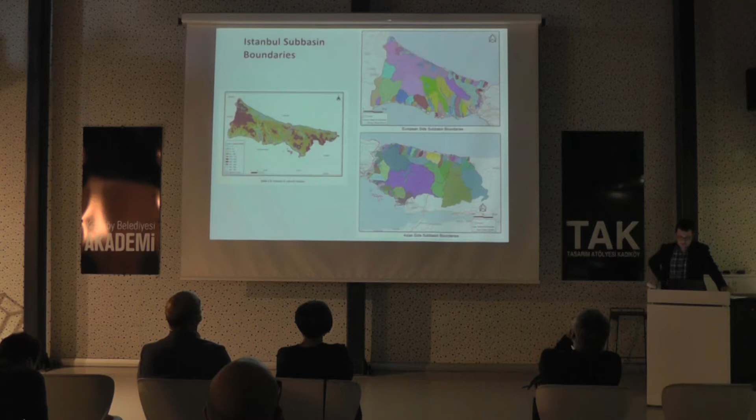First, for flood protection, we make stream restorations. We try to choose the best cross section. I say try because it isn't as easy as making projects or imagining the best, because cross sections depend on making the most efficient one for hydraulic conditions. We make engineering calculations, hydrology and hydraulic calculations, and we have a cross section.

However, land ownership in Istanbul is a very challenging topic, because if you want to make a wider cross section, you need to occupy someone's land, and land prices in Istanbul are very high. So the budget of buying that land is much more than the construction budget.

Also, as a result of some unplanned urbanization in recent decades, we should construct our new cross sections in urban areas. So making construction in urban areas is also another difficulty we face. These are some examples from our stream restorations. I will also mention them later.

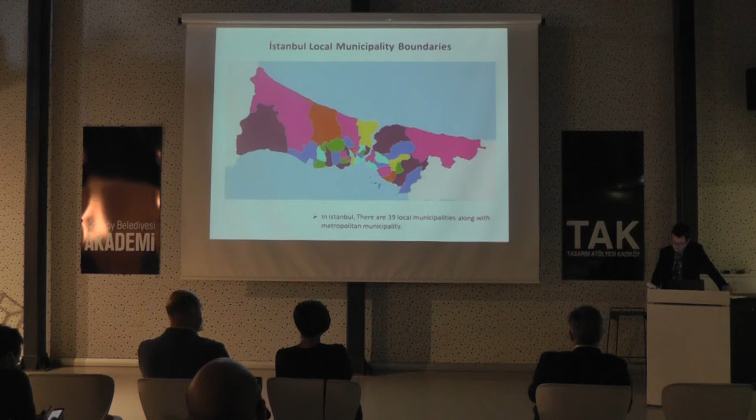Another important information we have from flood maps and share with local municipalities is flood level. As I mentioned before, land price is very high in Istanbul, so we cannot say people don't make a building here, here's a flood area. We can only say, yes, you can build something here, but there is a flood level here, and in case of any flooding, please make your building higher and make your plan according to this flood level and take your precautions in your building.

We want people to build their houses above flood level, and above flood level we want them to put their entrances, electricity and ventilation equipment, etc. The most important thing is that we don't want any residential volumes under flood level in the building, because if you look at the buildings, there are basement floors, and it isn't safe, especially below flood levels. We want contractors to make parking lots and auto parks at that level and use good insulation in their auto park doors.

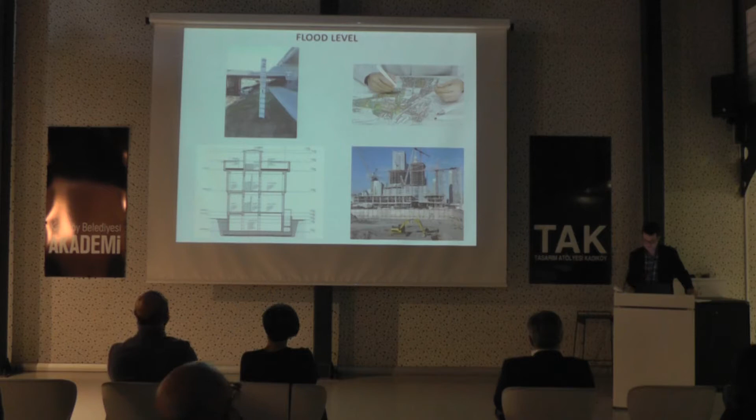And we want all municipalities to make their urban plans by considering our flood maps and flood risk levels. These are some examples from different regions.

I chose them because they are from Istanbul and summarize what I want to talk about. The upper ones are new buildings, and they use our flood level and make good designs. If you look at the buildings, they are high and their windows are above flood level.

On the other hand, the tragic one - there is a flooding and some municipality officer is trying to save someone in a basement floor. If you are in a basement floor, a very small amount of water is enough to make a disaster because you are below the flood level, so the water rises until the ceiling.

Especially people with some disadvantages are much more in danger, like children, the elderly, or handicapped people. Or if you are sleeping, you also have no chance.

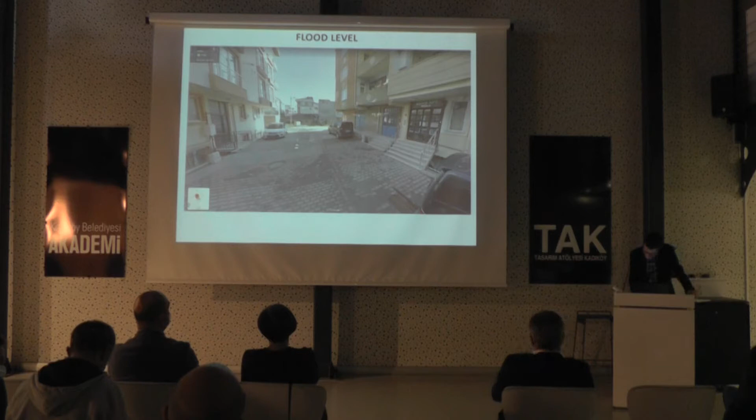This subject should not be open to interpretation. Certain rules and regulations for all regions are needed, to make a general idea. I want to speak some about Ayamama Stream,

maybe as a case study. Ayamama Stream has a very large watershed, more than 65 kilometers square. Both urbanized and rural areas we see in the watershed. But there is something important here: Ayamama Stream intersects two major highways of Istanbul—one is the Trans-European Motorway, and the other is the E5 highway. These are the most crowded and largest main highways of Istanbul.

In September 9, 2009, there was a flood, a real disaster in Ayamama. Unfortunately, 32 people—when talking about these subjects, defining people and life numbers can be easy, but it wasn't so easy. There are more than numbers in those lives.

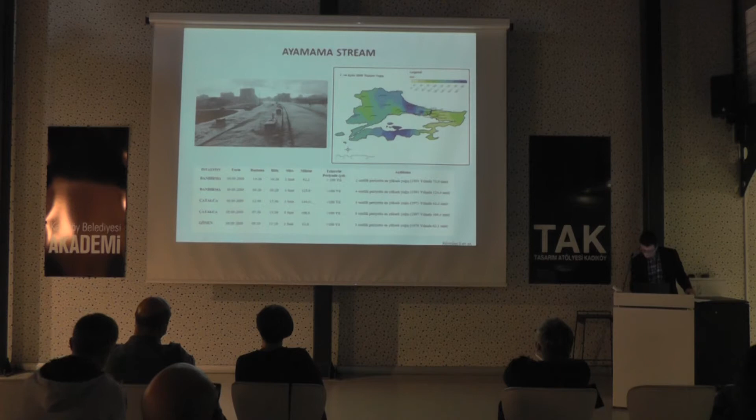I want to watch this. Starting: firstly, the water is starting to accumulate above the E5 highway—here it is the Trans-European highway. There is also some sort of bridge here. There's no problem, but the problems start to appear as time goes on.

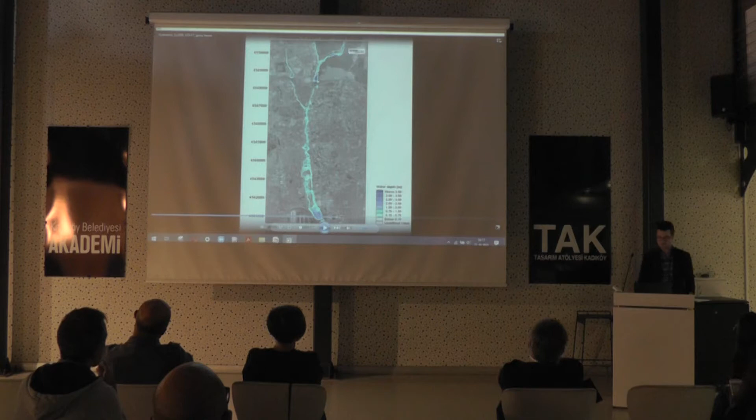It's increasing—there is no dam break until now, but without the dam break we also have flooding. Water began to come from here and from there, and at the entrance, the intersection here, the accumulation of water started, and all the water came. Here we have serious flooding because the water cannot go to the other side of the highway.

There's a large truck parking lot here. Lots of trucks and other vehicles began to collapse, enter the street, and get stuck in the water. Water started to rise and overlap the highway. Now the highway is underwater.

I want to share this with you to show that making proper cross sections alone is not enough to protect your city from flooding. There may be another issue, like a dam, or the cross section may not be in your authority—the highway government department responsible for highways is also involved there. Also, the cleaning of that intersection is important.

Also here there is a very heavy residential and very urban area—there is only gray color here. So we had a disaster.

After that flooding, our municipality decided to make giant cross sections for Ayamama to prevent flooding, but it is still going on. Mostly our municipality and our water and sewage administration finished building, but there are also some parts which are not finished yet.

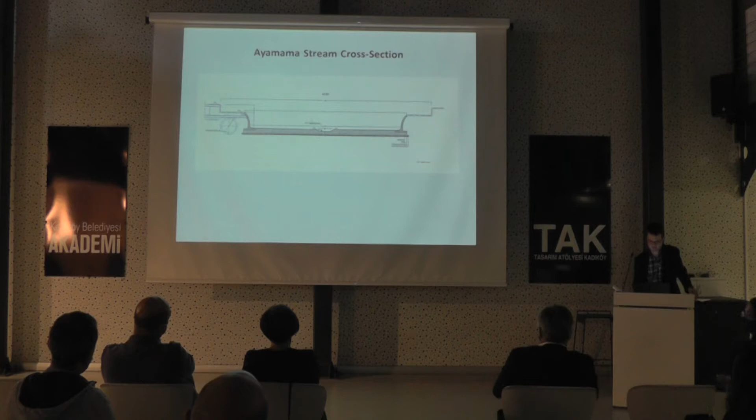It's a very large cross section, as you see, and in Istanbul, in our streams generally we see water only on rainy days—we do not have rivers. So just for a few days in a year we use a large cross section. This is the cross section of our project: we have wastewater pipelines parallel to the stream, and we have the real stream and the base flow area.

In recent years, we wanted to make more ecological and beautiful land and stream restorations. With that idea, for various streams in Istanbul, with our valuable Professor Hayriye Eşraf Tuncay, we worked really hard for most of the rivers and made stream restorations.

In doing that project, I learned something: making proper stream restorations is only possible when you work together with different disciplines—not only hydrology and hydraulics, but also landscape engineers, urban planners, architects, transportation engineers—because streams are the main lines in a city. So you should think a bit wider.

In the cross section I showed before, we want some social areas like these. People can use those areas during dry seasons, and during rain, with an alarm system or something else, people can live there, and we can use that area for drainage. Now we have projects in the near future. I hope we go further and make more ecological and social stream areas.

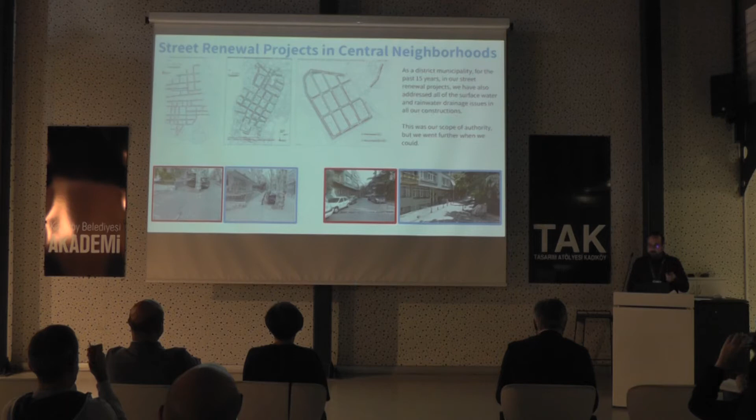These are street renewal projects in central neighborhoods. As I said, within the scope of our authority, we went as far as we could when renewing our streets. You can see water channels, etc., all renewed, and this would drastically decrease the precipitation that was discharging into the stream.

Maintenance of rainwater infrastructure was really important. We hadn't recognized that until the flood in 2010, but after the flood, cleaning and rehabilitating our current rainwater channels became a priority.

Also, the project contest for Kurbağalıdere was really important, I think. Kadıköy Municipality called for a project competition. Even though the project ideas were enlightening, no one had considered the land ownership and expropriation factors when trying to urbanize the area - all of the projects were considering de-urbanizing the area.

You can see the buildings that will be demolished by nearly all of the concepts that were proposed. The red ones are indicated here.

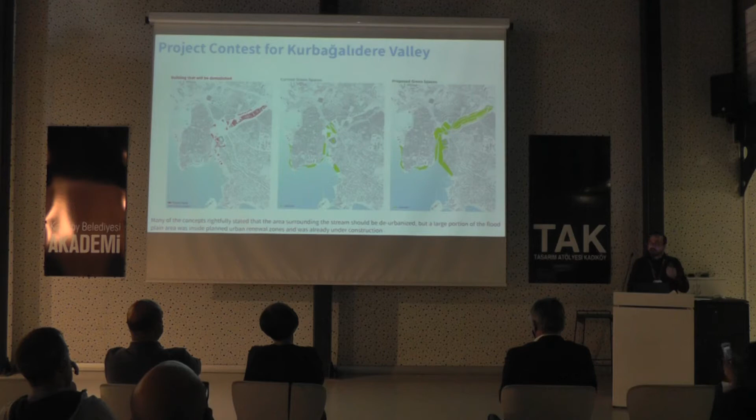Many of the concepts rightfully stated the surrounding area should be de-urbanized, but a large proportion of the area was already inside the urban renewal zones in Fikirtepe and Hasanpaşa. You can see the urban renewal zone here. This was also an area that halted construction. You can see the slums around and a few large structures here. All of this area, and Kurbağalıdere is here. You can see Kurbağalıdere going through here.

This was also a big problem because we had no way of gaining land, obtaining this land in order to urbanize it. It was all land-owned. So in 2012, by the Metropolitan Municipality, the remediation of Kurbağalıdere officially started. This is the project inside Kadıköy district.

As I said, it's a huge stream that goes a very long way to the north of Istanbul. The project also included a complete overhaul of the waterfront in terms of recreational functions, because it was really important. We have Watershed Park here, a really important recreational space. We also have Topography Park over here, and also Moda, the famous Moda, is here. So it was a really important space for recreational purposes also.

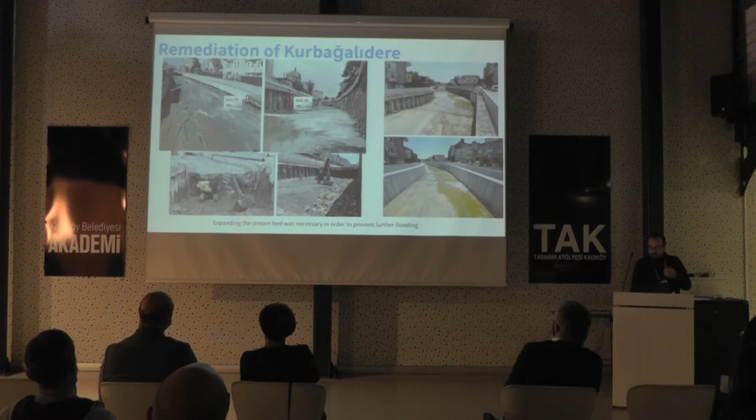This was an addition to the previous stream remediation works. So the waterfront was also completely overhauled with recreational purposes considered.

There were also, as I mentioned before, issues where the water was not moving as much as it should, so people started considering force mains. They were considered both upstream and downstream. One was in the Moda waterfront, and the other one was in the municipalities, north of the municipality.

Also, a replacement channel was built. This was to prevent wastewater from pouring into the stream. A TBM wastewater replacement tunnel was constructed. The channel connected the wastewater to the current water treatment facility on the other side of the Cafer district.

This was very painful work because this is the entire transportation load of Kadıköy. You can see this area here. So it was a really painful phase of the study.

After we completed the remediation of Kurbağalıdere, the project was finished during the pandemic last year. But we must be aware of the real problem: these are only short-term remedies. These are short-term solutions considering the rising level of urbanization, because Kadıköy is affected not only by Kadıköy itself, but by the watershed and urbanism growing very fast.

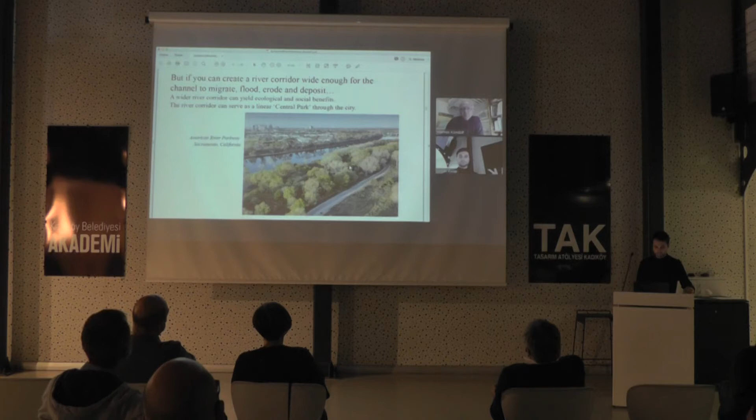The basic approach of this design team, Georges and Julien Descombes and ADR architects, was not to completely obliterate this canal from the landscape, but to fill it mostly in, leaving a few parts as focal points for human activity like picnic areas. Then, to the south, they expanded into what was then agricultural land—about 200 meters of territory they could take over, allowing the river to follow a natural course.

Now, the way they managed this natural course of the river was interesting. They wanted the river to be able to choose its own course through a set of potential channels, rather than imposing a certain geometry. Unfortunately, what often happens in the United States is that an idealized geometry is dictated to the river, and since the river doesn't cooperate on its own, the banks are fixed in place with boulders or other heavy elements. But instead, they wanted to allow the Aire River to freely adjust and find its own course.

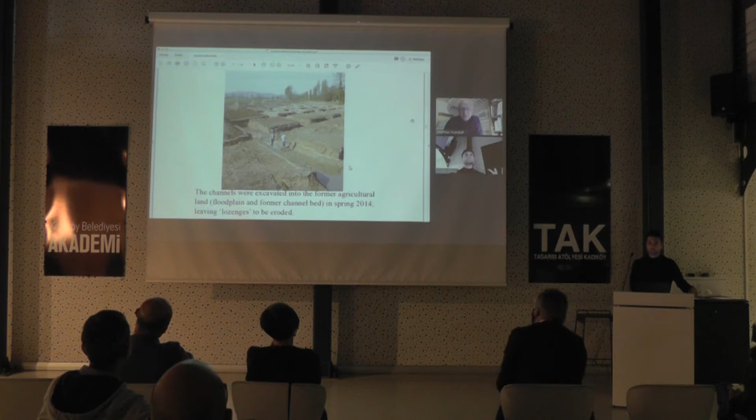This crisscrossing network of channels was excavated onto what was then the floodplain, with the idea that the Aire River would erode out its own channel over time. And that's what we see has occurred—this is after the first year of very small floods that were already beginning to create a more natural channel.

This is a series of drone images from 2014, right after the network of crisscrossing channels was excavated. You can see, as time goes on, how the natural river channel starts cutting out into this landscape. By the time you get to the last photo here, just a couple years later, in 2016...

Yeah, 2016. It's already looking like a much different place. We have a paper on this coming out in Landscape Architecture Frontiers that has this image and some more description of the project. And if you go to the Aire River today, it's really like a green heart, a bit of wildness within a large urban area.

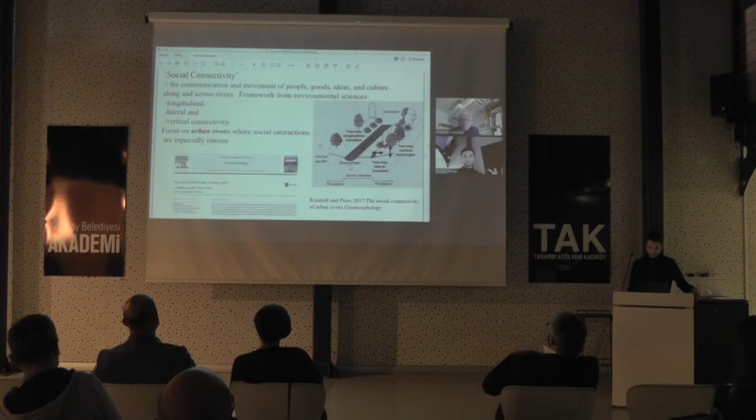So borrowing this framework from the environmental sciences, we can look at our activities along rivers. And we can see how we can restore, for example, lateral connectivity. Again, going back to my first point, many of these center cities with their rivers along which they were built, as the industry has moved, you have the opportunities now to bring people directly along the river.

By the 1960s, though, the banks of the Rhone had been given over to parking. And you had prostitutes and drug dealers. It was not a very safe place to go.

But then in the early 2000s, Mayor Collomb undertook this huge project in which they tore out the parking and created spaces for the people. The right wing was very opposed to this project, and their main argument was, we can't lose the parking. And so this project, in order to restore the riverbank, it required construction of massive underground parking structures right nearby to compensate for the loss of parking.

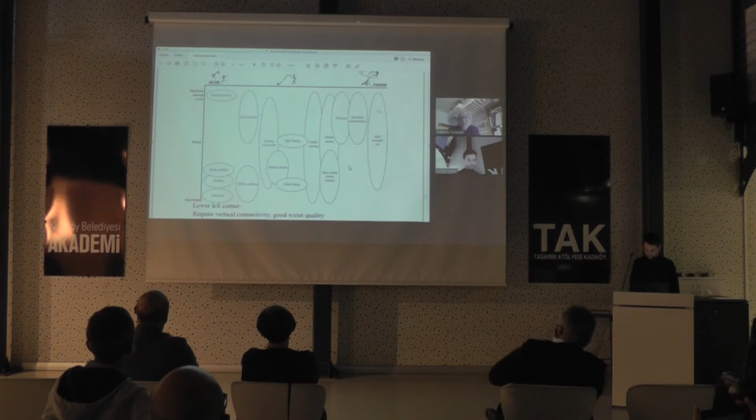Looking at these different human uses of the river, we can identify a gradient of passive to active uses, and uses that are up on the bank to uses down in the channel. We can see a two-dimensional space like this, from active to passive, from up on the banks to down in the channel. Here you would have swimming, an active use in the channel. Here you would have quiet, secluded use, which is up on the banks.

An example of restoring vertical connectivity is the construction of wooden platforms along the Rhone in Geneva. Here is the confluence of the Arve River coming in from Mont Blanc with its load of glacial silt, and here's relatively clear water coming from Lake Geneva. And here you see these platforms that have been built. The idea is you had these concrete walls before, vertical concrete walls, so it would have been theoretically possible to jump into the river and swim, but you couldn't get out. Now with these wooden platforms, you have a way of easily getting out of the river.

So this provides access and riverside gathering spaces. On summer days, these platforms are heavily used. Many people will swim down the full 500-meter length, and they're distributed along this about 500-meter stretch. This platform is one of the biggest, and this is where you should definitely get out, because otherwise you are going to go downstream and hit the confluence with the Arve, which is extremely cold water just melted from the glaciers up on Mont Blanc.

And then just to wrap up, there are many events that are set along this newly reconnected riverbank. It's a very popular place and has proved to be a huge success. So this is a very quick tour of some of the aspects of river restoration in the urban context. Some of these might provide food for thought for you as you're encountering your project on the Ayamama.

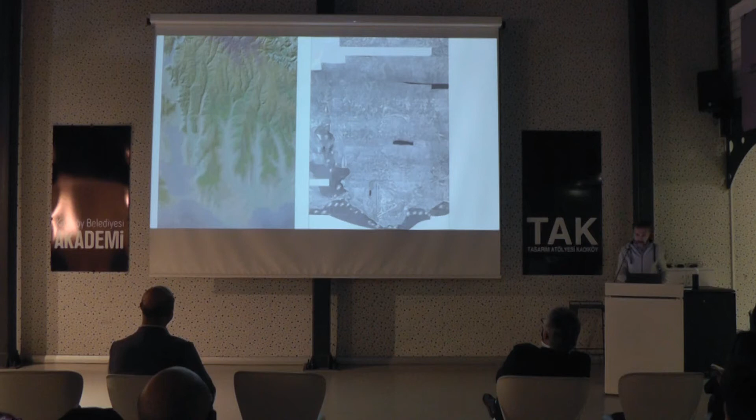We can also see the pattern of ownership. There are lots of small parcels around the river.

On the left side, it's from 20 years after the first map, 2004. We can see lots of development on the Ayamama riverbed because the arterial roads were being built at that time, working very densely as well. There's also an industrial zone developed in that period, and we have the Turkey port here too.

In the 90s, after the road developed, the Ayamama River turned into an industrial zone, and the residential areas surrounding that industrial area resulted in that mass urban development pattern.

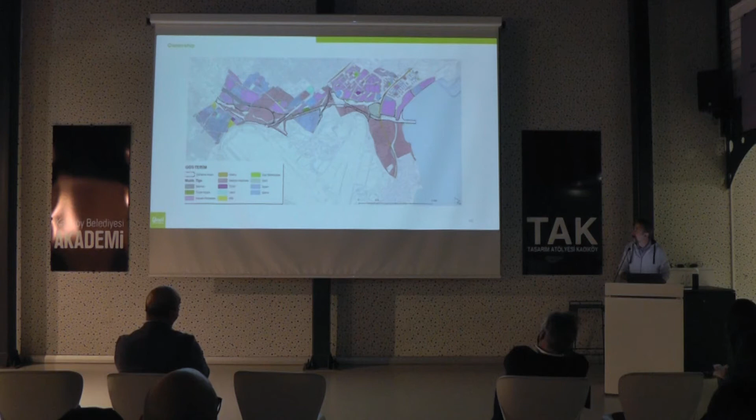But we have some advantages around this area which has no ownership - it's also some kind of strange thing. But after doing this project, I think Ayamama will own this map also.

It's also a 3D mesh map which shows the surrounding uses and especially the border of the project. Of course, because of the length and the huge problematic area of the Ayamama River, I measured it as 18 kilometers from source to end.

Only 4 kilometers is done for the recreation, especially around the Watershed region that we saw in the first stopping point. And we have started this project area as 6 kilometers. So there are left another 8 kilometers that is under construction by the Sewage and Water Department of Istanbul, also as we saw today.

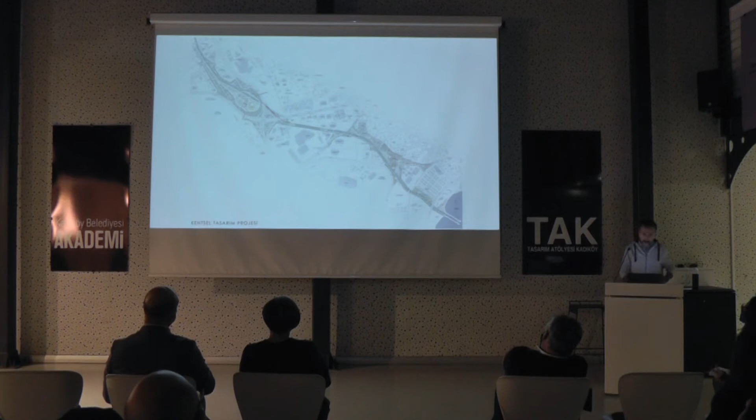But after taking that project, we had also lots of challenges with the other departments of the municipality, which has already developed some projects around these areas, and also, as we see in the field today, there are lots of connection problems of these huge pieces of land, especially around Çobançeşme junction. There are only passing spaces for the river. There isn't any space or room for pedestrian or bikeway passing.

So they proposed a high elevated bridge over those infrastructure, but it will be very expensive to do it, and maybe we cannot force people to move over that very high and lonely infrastructure over that highway area.

So, as I mentioned before, first of all, we take transportation into consideration, and especially also we had lots of opportunities of that area that we can connect all of the area to the rest of Istanbul also.

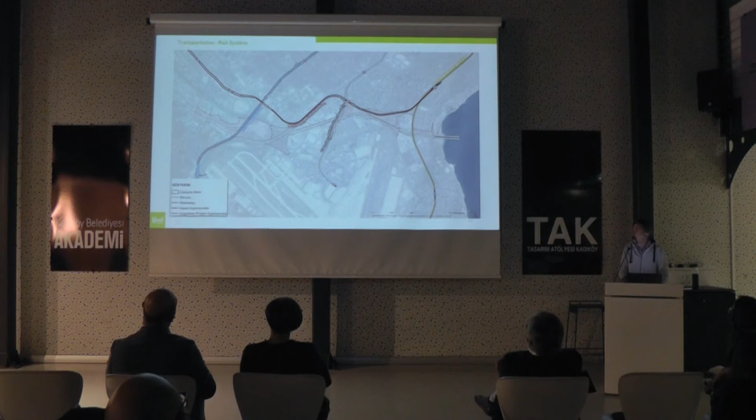We had Marmaray, we had also, which was built 20 years before, the Atatürk Airport rail subway, and nowadays it is under construction, that Ataköy to İkitelli subway project, which has one station combined with the Marmaray junction station, and another possible entrance to the Ayamama River project is the Ataköy station, and the Çobançeşme station, which we can connect to the Çobançeşme region of the area.

And as I mentioned before, cancelling the proposed road solution for Çobançeşme crossing, we take this place into consideration to find small improvements to pass this junction, and we just wanted to build

underpasses 5 meter wide and 2.5 meter elevation, which has that ceiling height, passing through the highway ramps to the underpass of E5.

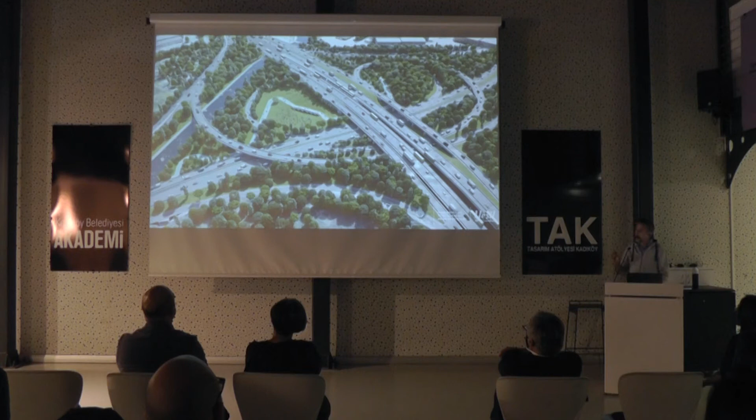Also, the most problematic point is passing through the Basın Ekspres highway. And we found that the former underpass of Ayamama River still lies there, so we can dig it and use it for the pedestrian and bikeway connection.

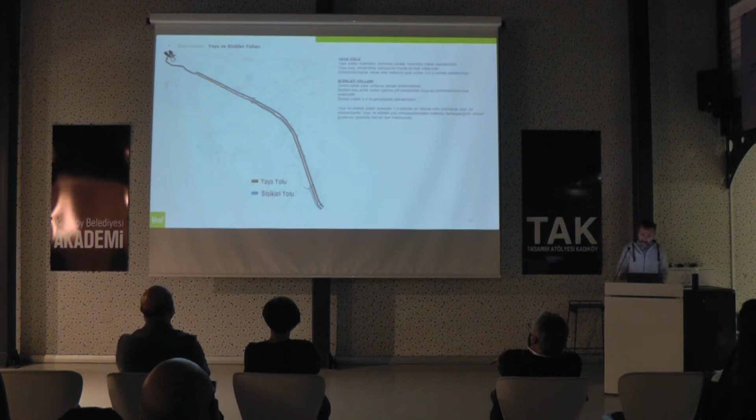After that, we gave it to another company to go on preparing the application projects, which is called Vintage. They prepared it with coordination with us, especially on the first phase of the project. And we, in the municipality's Parks and Recreation Department, developed that riverside pedestrian and bikeway, and prepared some images for the development of the area.

Also, there are some remaining parts of remediation which will be done by the Sewage and Water Department. And after that, we can continue to apply this project to the land.

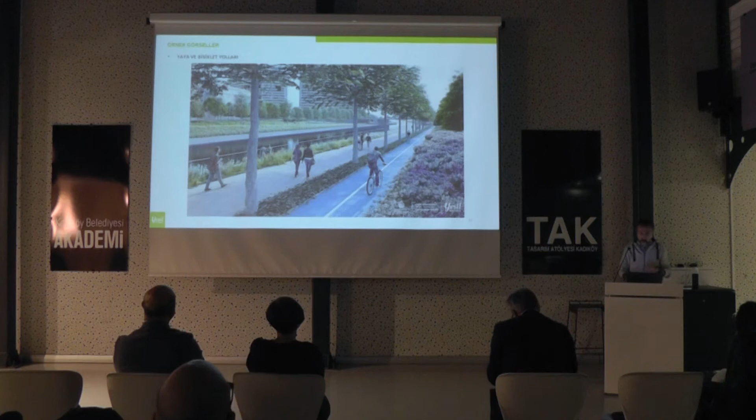We also worked with the sewage and water department to give room for cleaning purposes of the river. So we didn't design any functional areas around the river, just for walking, and the wideness of the road relates to the excavators that they use. At the end, we proposed a pedestrian and bike bridge which can also let cleaning vehicles pass under the bridge.

Those spaces are owned by the government and are named as the recreational area of those projects. We are continuing to work on publicizing that area, which will give a chance to create a starting point connecting the Ayamama River to the rest of the shoreline of Istanbul.

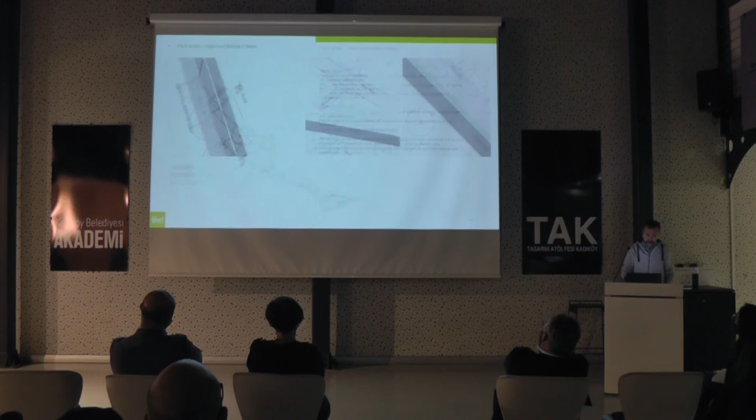These are some detailed drawings. We also have some demands from people, a little bit strange ideas.

There's a lotus flower collector who demanded a place to present his lotus collection. He didn't have enough space, so he demanded it from the Parks and Recreation Department and the Mayor of Istanbul to locate this, and we found a place for it. It's much more like a grocery store, but he is very obsessive about how to grow that lotus flower, and he gave the requirements of the project himself.

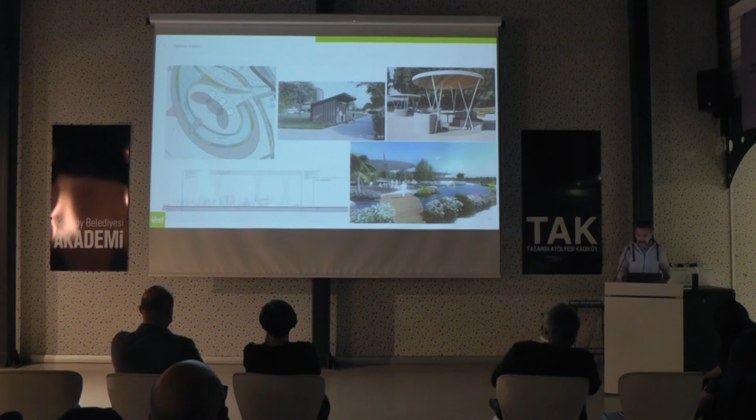Our teammates developed this project in that area, which was a former construction zone. It includes lots of recreation areas like festival zones, seasonal usage areas, and sport areas, that kind of thing.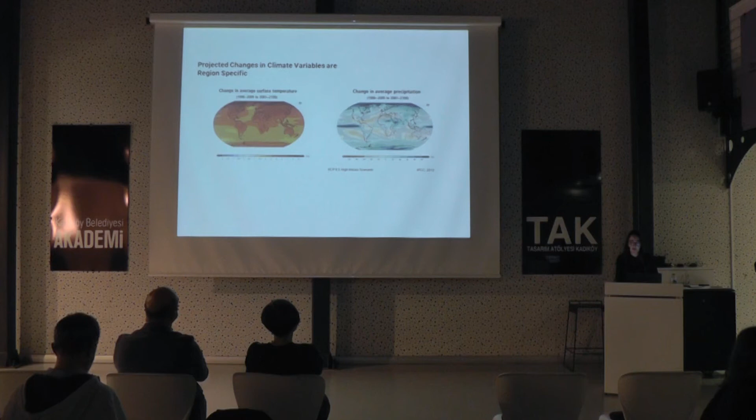As we've already seen today, there are projected changes in climate variables, with higher precipitation rates but also higher surface temperatures rising across the world. Within Istanbul specifically, there's a lack of open space, and with climate change, there's an increase in intensity and frequency of rainfall and precipitation. With urbanization, there's a lack of open space, and a huge effect on earthquake risk, where many people don't have other places to relocate with earthquake damage.

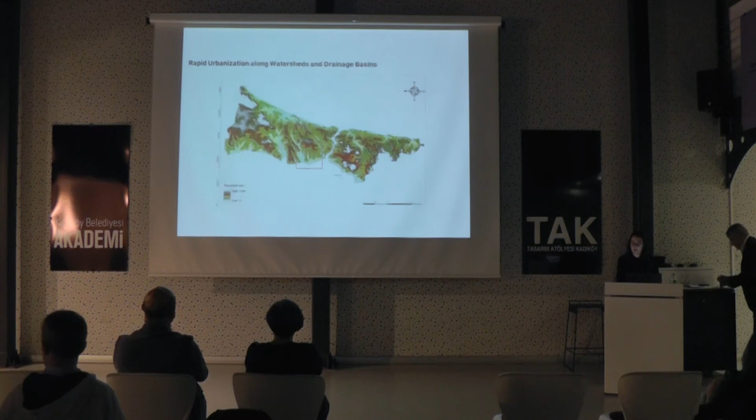The rapid urbanization in Istanbul has been encroaching on the natural hydrological systems. You can see the red layer of urbanization overlapped on the natural topography of the terrain. This impact of urbanization is threatening water quality and increasing flood risk in cities, because there's a lack of pervious surfaces, preventing water from flowing naturally.

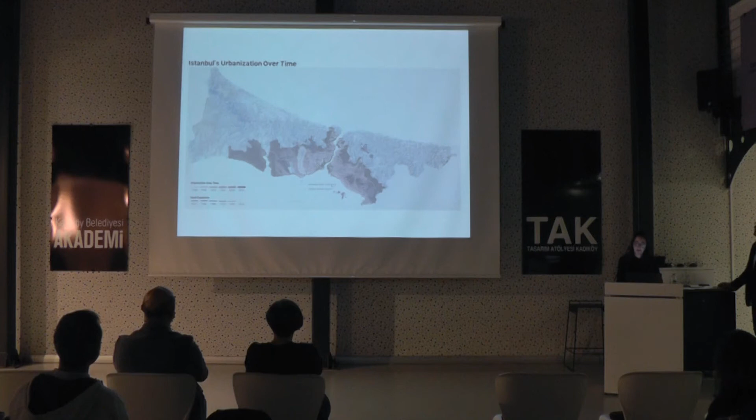Within the Ayamama River in Istanbul, as we've already discussed, there's a degradation of urban watersheds and an increase of flood risk due to urbanization. This shows urbanization over time from the 1990s to 2016. Urbanization is encroaching uphill into the urban watersheds.

Within that context, studying the Ayamama River watershed, it's located right next to Istanbul Atatürk Airport, connected to increased urbanization and economic and industrial development, which has also led to a population increase along the Ayamama River.

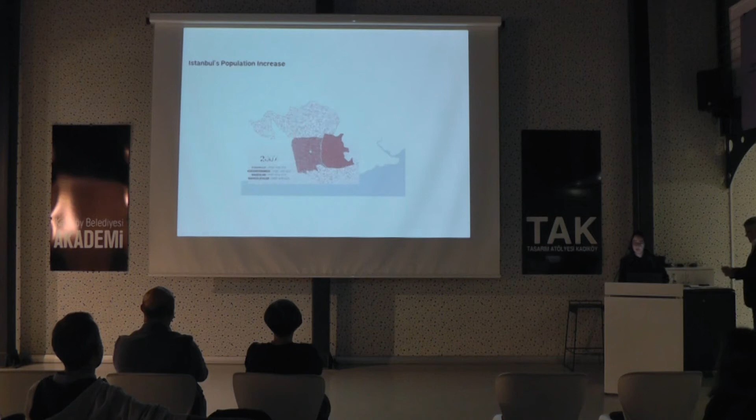The stream runs through districts that had to be subdivided by population region, and the transformation of the site has been from highly agricultural land to heavily urbanized land. Studying the Ayamama watershed through urban analysis looking at economy and transportation, we know the Trans-European Highway and the E5 highway created a huge increase in economic development, forming this economic corridor along the river.

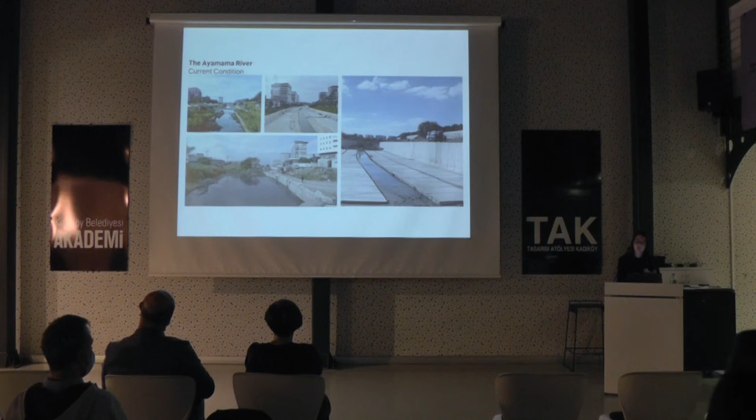With that economic development, the river had to be channelized to increase the space for development. And so we've seen the increase in flooding due to that, but also, with the examples you've seen today, the river restoration has come in the form of de-channelization. And these remedies have come as a reaction to the increase of flooding, but they also call for questions of how we can not only remediate and channelize, but how we can restore urban streams.

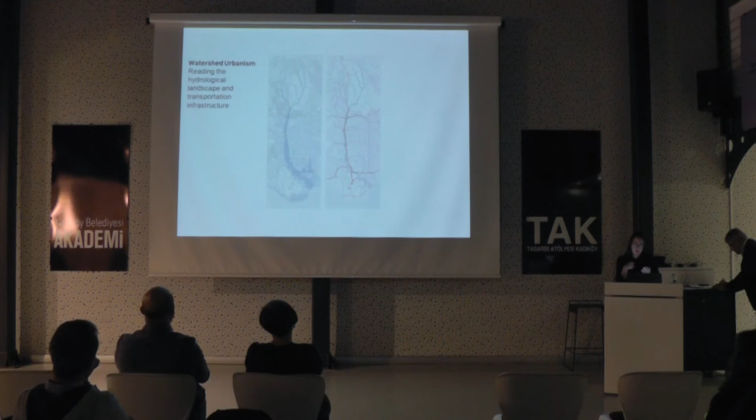We can see examples across the world, and of course from today's lectures, different examples of restoration. Looking back at the Ayamama watershed scale, we can see the risk of flooding within the floodplain. Over here you can see the area of the 2009 flood, but also this overlap, this contradiction between the water stream and the transportation infrastructure. So there's this kind of fight, this contradiction between the economy that wants to expand and more transportation that's expanding and the increase in flood risk.

With that, we can also see the importance of studying the watershed through the hydrological layers and also through topographic layers, in order to start assessing the areas that are actually at risk of flooding. You can see that at the lower elevations in blue, these areas are more at risk of flooding versus the higher elevations in yellow and red, which could be seen as safer zones. So connecting to infrastructure around the Ayamama River, we can locate the airport site over here as a safer zone, partially intersecting with the Ayamama River watershed. And with that, I'll hand it over to see how to introduce the airport site.

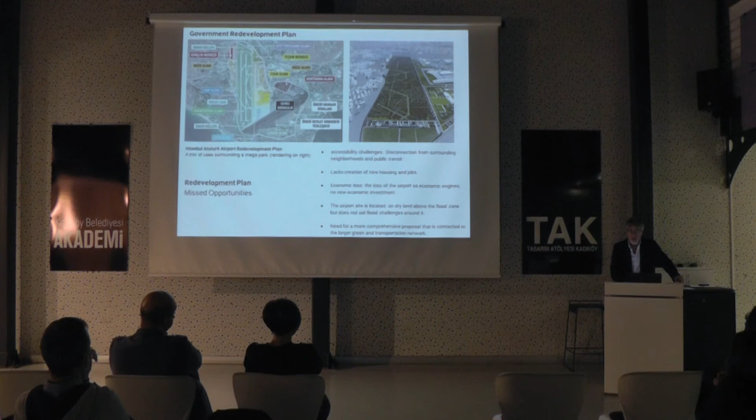And just around the corner, or 4 miles, or 4 kilometers, or 10 kilometers upstream, we know that there is a place near the airport that needs that green. Now the model used in this plan is typical of many cities. They have an airport that becomes vacant, and for political reasons, the easiest thing to do is turn a runway into green space. Many cities have done that. But here, right next to those runways, right next to that green, there's all this area that really needs that green.

So the thought was, this swap strategy is a way to conceptualize that investment in river restoration isn't out of nowhere. It's coming out of this open space that can exist nearby, and in place of, in parallel to, that open space, development can happen that supports it. So the strategy is to link two parts of the city that belong to the same geographical watershed, in terms of development and restoration.

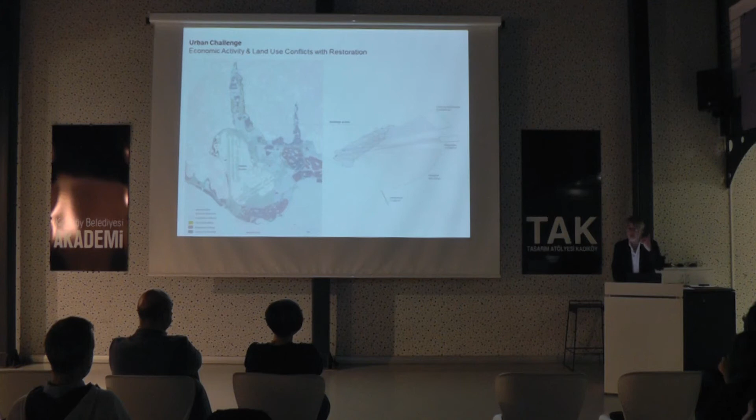This is what we've been doing at various scales and degrees, working to restore the floodplain while creating new development opportunities. We explain it this way, and there are many other ways we try to communicate the idea of the high-risk zone versus the low-risk zone. If we can remove high-risk buildings from one place and relocate them in another, we can still develop a large part of the airport site, while at the same time creating this linear green corridor, which everyone here agrees is the right thing to do.

So we arrive at a vision plan that has both green and development, commercial and new residential zones. This is very telling: the plan currently has 240 hectares of green space. Combining that in a new vision, where there's still green space on the airport site, we can arrive at 550 hectares of green space, combined with the corridor, in a form that makes much more sense for the city and for the environment.

This is really the crux of our large-scale vision here. And now we're at the point of developing this into smaller sections and fragments, using a lot of the ideas, resources, and knowledge here, in order to promote this idea.

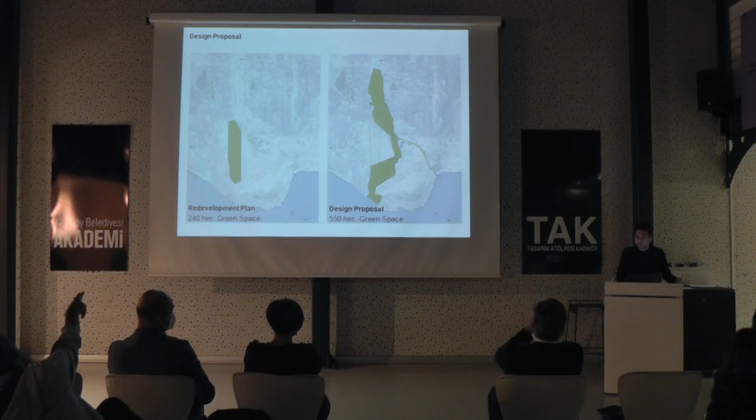Actually, I don't have any presentation. I just wanted to say hi to everybody. But I would like to say that it's a very good opportunity for all of us to talk about this really crucial issue, which is a painful issue for Istanbul.

On one side, there is this really sincere attempt to solve this river problem, and on the other side, there are a lot of challenges that any city around the world is facing. But when we look at the history, this area in Istanbul, with all the rivers, the Europeans would call Istanbul the sweet waters.

Because the rivers were so clean, and the landscape was so pristine, so nice, and so romantic, for the Europeans it was the sweet waters of Istanbul. They carried that notion and image into their drawings and literature, and it was also part of the fabric, part of the culture. So what we see today as a disaster is actually a cultural heritage for all of us. As landscape architects we see them as natural assets, but in Istanbul's case they are definitely heritage.

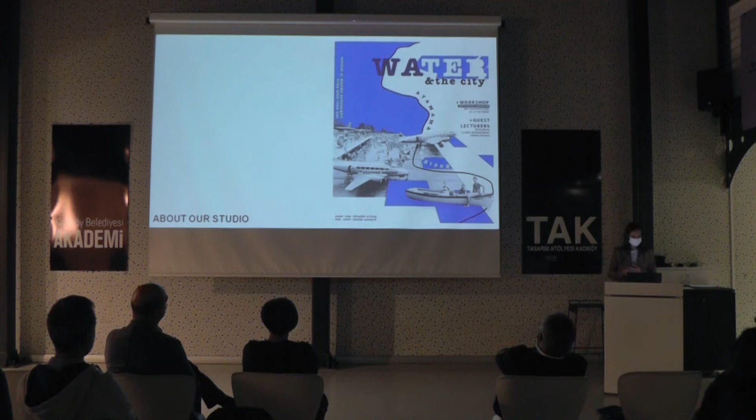This is a poster of our workshop. So today is just the 3rd week of our semester. It just started on the 4th of October. So it has been a really tight schedule for us, for our students, and it has been a really unexpected period for us after the COVID situation. And we started. Yes, these are our team.

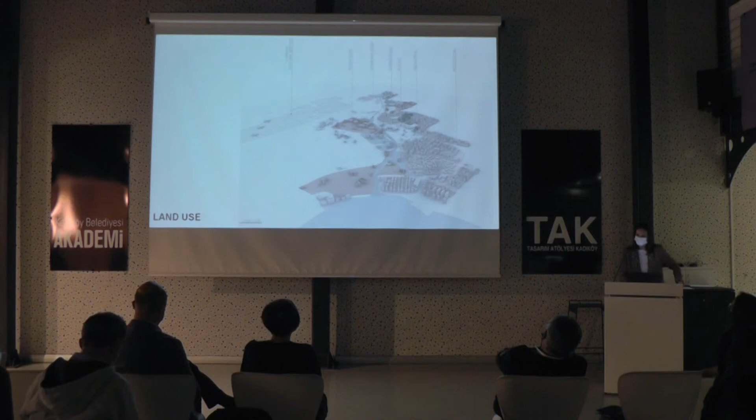But from the perspective of our students, firstly they are asked to do the entire area's 3D model. So they try to complete the 3D model in Rhino, and they try to understand and explore what the problems are. So they just started from the beginning and they try to understand by the starting point. So this is their analysis.

This is the green areas and transportation network. According to their view, they saw the continuous green network on the coast, but they cannot see a green continuation zone, green continuity in the inner part of the cities.

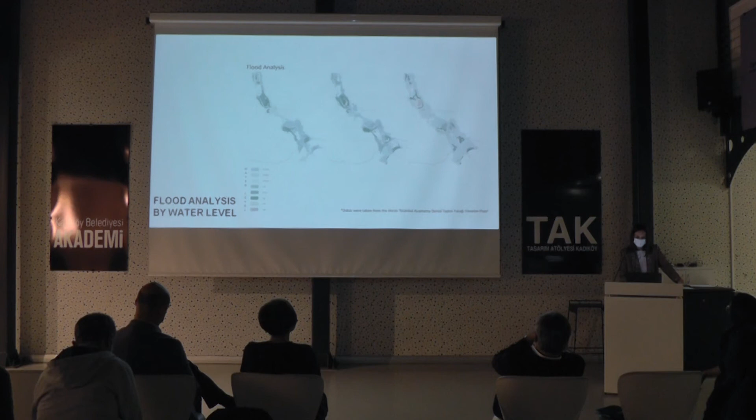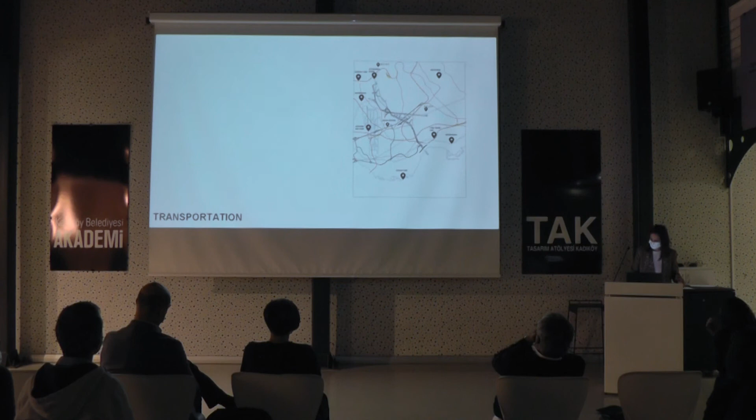This is the flood analysis, and we saw this in detail, and chronologically they did several physical and social analyses, and they revealed how the urban texture of green spaces and the transportation transformed chronologically from the 1960s till today. So these are all the analyses: the change of the coastline, the change of the green system, change of the transportation network, and how the urbanization also encroached on the greenlands and the river corridor.

And this is the change of the urbanization. I just want to skip and come to another important point, from the perspective of the students - they had interviews on the site. So they revealed that not only do the physical conditions show us the problems of the site, they also explored the problems of the site through the citizens.

And she asked about how you find Ayamama, what do you know about Ayamama. Her answer was, interestingly, flood and the people died. So she remembered that day and the occasion. But then she told me that this area, this region, had been a recreational area a long time ago.

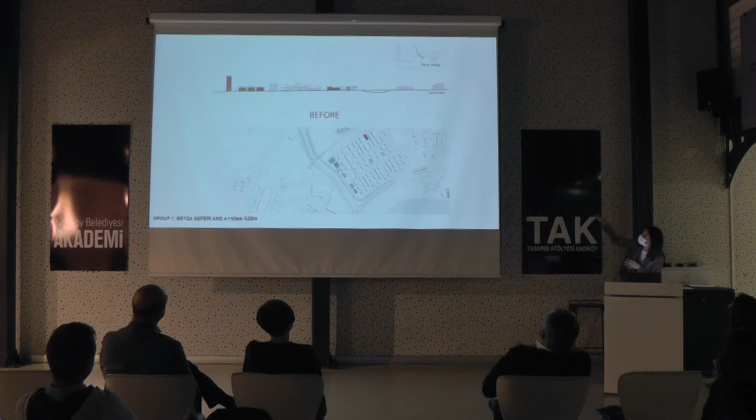So this is what she said, and then our students made a section and put the point where she lives - this is the existing situation. And then they also did the before and after, studying how they can solve her problem.

Of course, they call it 'urban movement,' their project. Of course it's very labor intensive, and they decided at least to have continuous pedestrian and bike flow, and they would like to have crossings - just what we have emphasized a lot on the U-shaped concrete section. So they have to cross between two sides of the river.

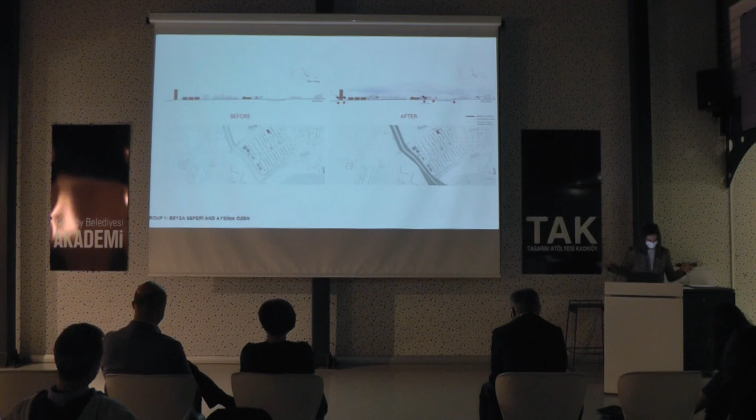This is the solution - they have overpasses, underpasses, pedestrian crossings, bicycle and walking paths, what she needs in her dream.

So this is another group. He's a 20 year old guy, Gökay, again from the south, but he has his house in Ataköy, and he's coming every morning to the site using the bus. What is his problem? He's saying that between the bus stop, the job, and the house, it takes 25 minutes - so it means a lot. So he wants - my students' aim was how we can decrease the duration of that time.

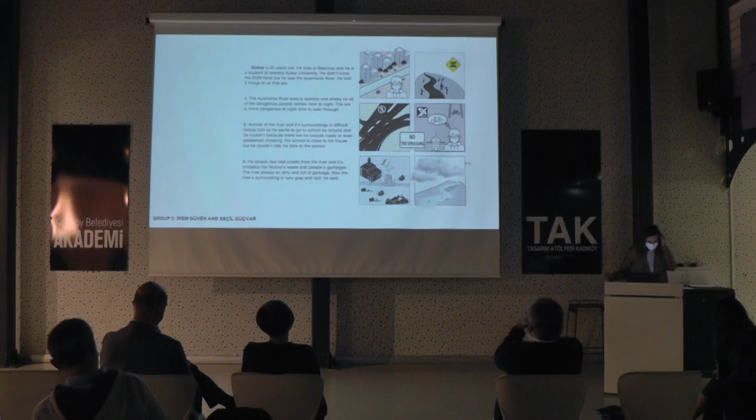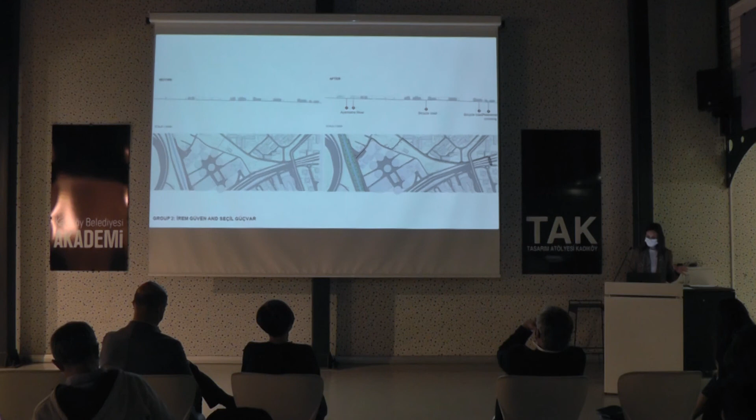Then this is the section of the road Gökay is using, and how he overpasses or underpasses to reach from the bus stop to his work. And yes, these are the different sections. So they need safe and very continuous pedestrian access.

He also added the purification problem of the river and pollution of the river, because of the smell. So they worked on the continuation of the traffic flow and the continuation of the pedestrian flow. And this is another group, the third group.

I want to skip this one because it's not so readable, so I want to come to the fourth group. This is 26 year old Emir - he leaves his house to go to his job in Ataköy. So, I mixed up some of the slides, but it is about, again, the safety of pedestrian flow and the lack of bike-cross pedestrian roads.

And this is the section, and this is the flow of the pedestrian pattern. So now he walks comfortably on the wider pavements and design.

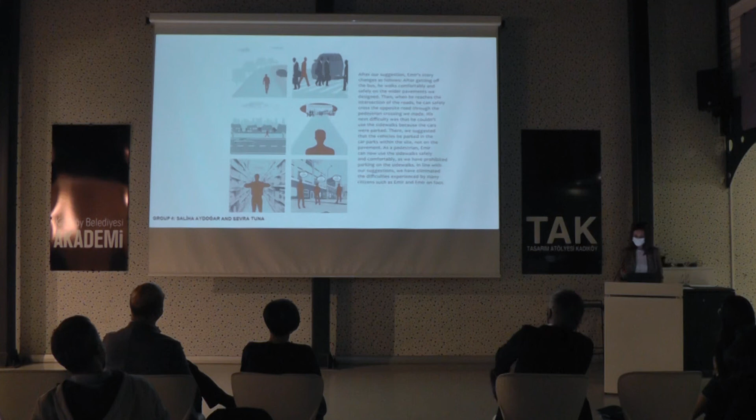When he reaches the intersection of the roads, he can safely cross the opposite road through the pedestrian crossings that they made. So now they can also socialize in the safer zones, social clubs. And this is another group.

He is 42 years old and lives with his wife, 2 children, and a dog. He is satisfied with his surroundings because there is adequate green space around the house. But he lives in a low-rise decent place in the north of the city, and doesn't feel the metropolitan structure of Istanbul while living there. There is a green area where he can take a walk when he leaves his house, but it is not a very defined space. It has a security problem, especially in the evening, since the lighting is inadequate.

Selim Bey likes to take a walk in the morning with his family, and also spends time outside at night.

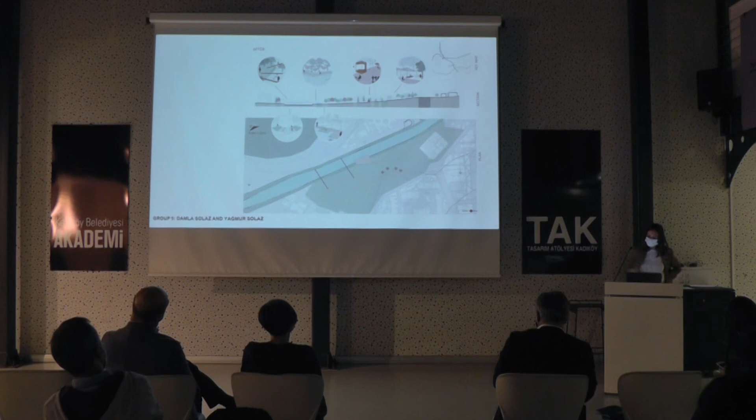They transformed this area into green space, with more furniture for nighttime and daytime use. With these interpretations, they feel more secure and safe in this area. Yeah, these are all the sections.

This is the after images. This is another group: Gökhan, 65 years old. He's retired, but now he's very keen on painting and music. He wants to feel like he can play and paint in the outdoor parts of the city, so he's questioning if we can have a chance to play and paint in the parks, like maybe Parisian parks in Paris.

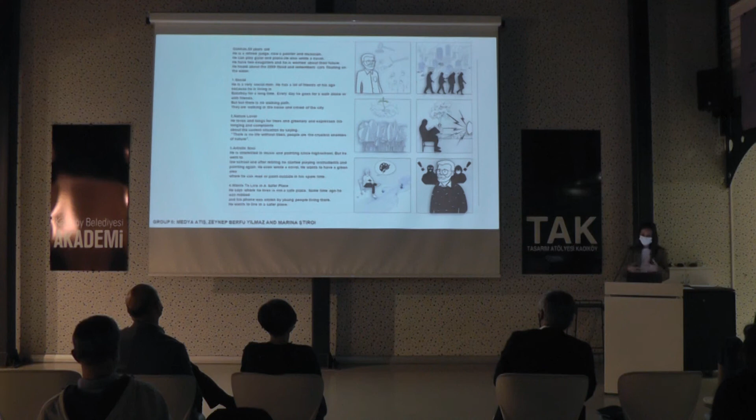How can we accommodate all these occasions outside, for someone who is a social nature lover, an artistic soul, and wants to live in a safer space? This is the section where he lives, in the upper north, and this is the section up to the green space.

So yeah, they create great parks, like linear parks called central parks, as we emphasized before. It's a perfect area for nature lovers and artistic souls, and now it is safer.

As an overall conclusion from the interviews with the citizens who reside, work, and have their education there, we found that the site needs a healthy link between the people and the water. This is the biggest problem, the biggest lack. There is no link, no dialogue between the people and the river, the water.

As a team, our proposal seeks to restore and build a fluent green corridor along the Ayamama River. Our aim is to convert the heavily human-impacted area, with its long history of industrial landfills and commercial use, by creating infrastructure that is more accessible, permeable, and green—a pedestrian and bike-friendly corridor. Our aim is to link the inaccessible sides of the water channel, transforming the site into a peaceful, accessible riverside with nice scenic views and lush green areas where people can stroll alongside the river.

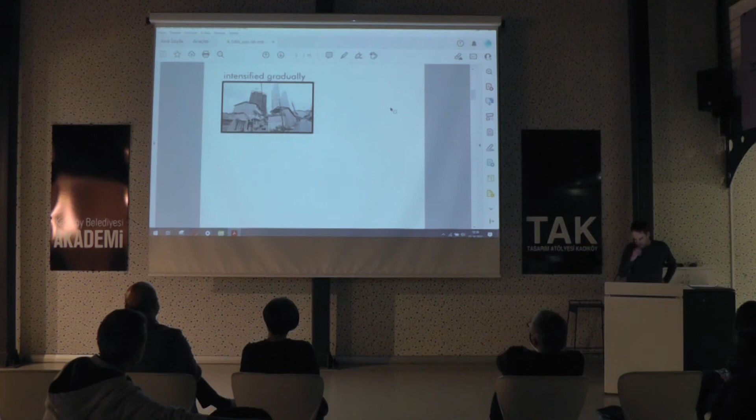First, it's intensified gradually, including some informal development. First it's developed informally, and you may see here very small, very fine-grained buildings and high-rise buildings together. So mainly it results in that fine-grained pattern, fine-grained fabric of Istanbul. As Gökçe presented, showing the ownership, it gives different problems of implementation, but also gives a chance to make smaller micro-interventions with the community.

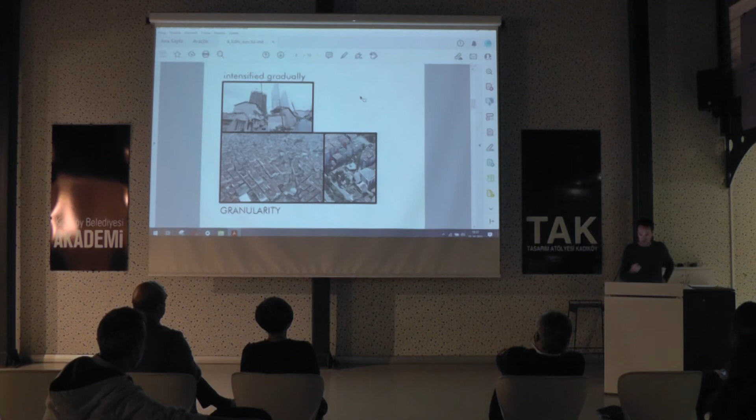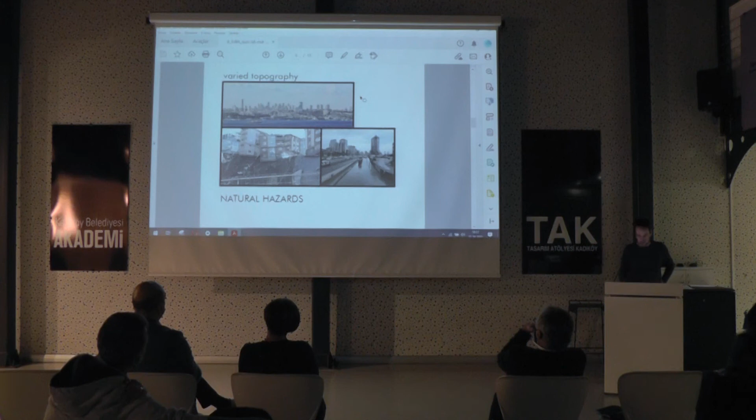And for today, we calculate that for all of Istanbul, 300,000 people are living in flood zones in different parts of the city. You may see, this is important, it's always mentioned and planned accordingly.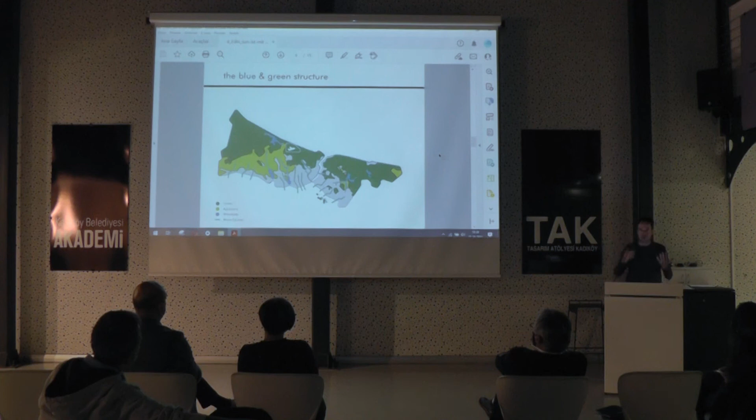So the general structure, like the footprint, the built footprint and the natural footprint of Istanbul. In the northern side there are green areas like forest and agricultural areas. On the southern parts, it's almost fully developed. But still we have those rivers. Ayamama is one of them that can provide a connection between the northern nature and the southern developed areas.

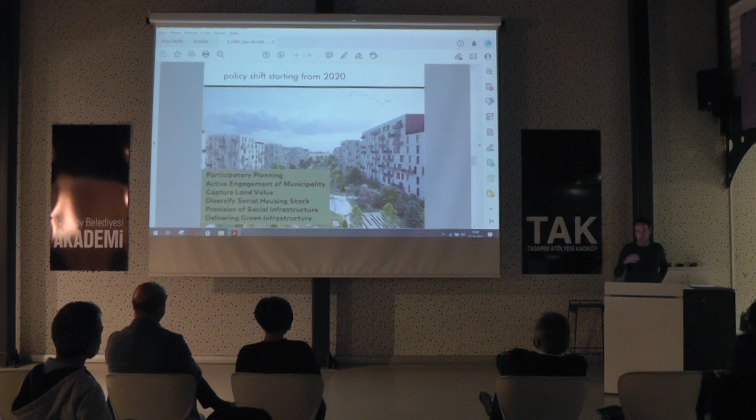And another one is the Istanbul Planning Agency itself. It was founded last year as a semi-autonomous think tank for Istanbul. We carry out multiple workshops for any kind of problems, problem areas, or priority areas of Istanbul. So if any problem occurs, we try to implement directly and combine or collaborate with all the stakeholders from the community as well as from governmental sides.

Mainly the planning agency does the moderation and facilitation, the co-thinking, defining the problem and trying to reflect the potentials for it, initiating talk and interaction between people, community, and governmental authorities, then mediating and disseminating the discussion, including data, expertise, stakeholders and experiences from other countries and institutions. Lastly, our aim is to co-produce the policy options, projects, actions, and gain commitment from the community and other authorities. So lastly, I finalize and come to Ayamama.

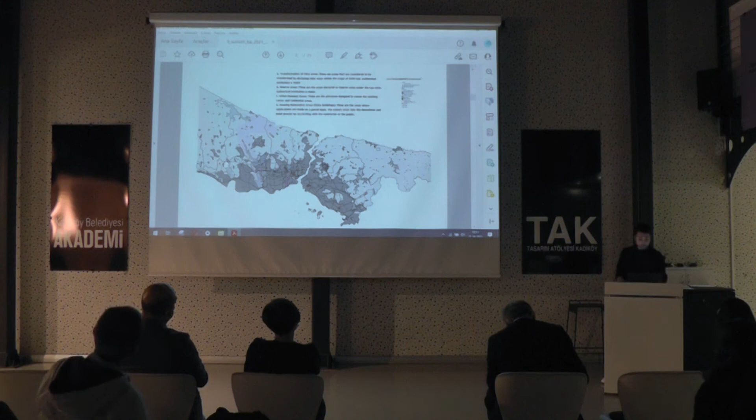The other issue we should work on is the scale. I'm not the best GIS user, but I tried to put all these river flows, all these networks, it's like veins in our body. Think about Istanbul in that way, and this is crazy. What we have to think about is that there is this basin, there are corridors, there are river network systems. So we should find design solutions maybe on a basin basis or in geography basis. Every corner of Istanbul has some kind of river flow or freshwater flow. This map shows this. It's very important.

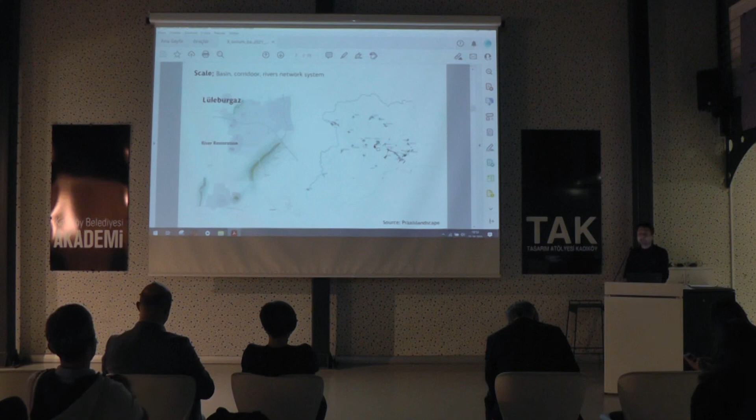So when we think about the scale issue, we should think more, maybe also about a more regional context. It's very important. If we can find a good solution for one of them, as we talked about in the break, the snowball effect should be implemented in all other cities. It's not only the problem for Istanbul. This map shows the Ergene Basin and some of the other rivers.

And we talk about this TDR model. Actually in 2013, our project team also tried to put together, not in an academic way, how we can implement this TDR model. We also believe this is a good model, and it's not a new model, lots of countries are implementing it. But this TDR model is very, very hard, and there are lots of sub-dimensions about it. When we worked on that model, there were ten important things, one of them is how people will make their application, how the municipality will work on that project, what is the role of the ministry, how we give people information, how we document all this public process, this bureaucracy process.

And there are the districts, and there are lots of districts in Istanbul. How is this gonna be transferred from one district to another? So it's a very complicated issue, this TDR process. And size is also very important.

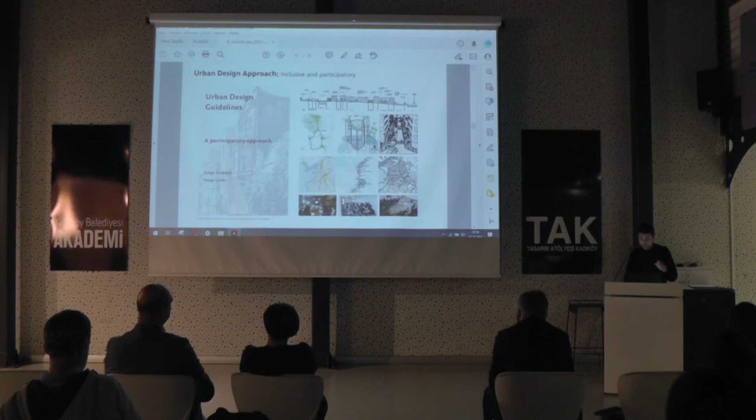And we did lots of participatory processes in that neighborhood, and there are lots of experiences based on this neighborhood. I'm really encouraging you to also check that Yeldeğirmeni experience. In that Yeldeğirmeni experience, we created some interfaces to create participatory processes. So this TAK Urban Lab is based on this Yeldeğirmeni process, because we wanted to regenerate this neighborhood, but

we wanted to make it in a participatory method. So we initiated TAK, we initiated community houses, we initiated art spaces, we initiated placemaking actions to gather some participatory data from this neighborhood. So maybe this kind of actions from neighborhoods or different areas of Turkey could be implemented in these watershed urbanism processes too.

And the other one is an example from one of our projects in Balıkesir, Havran. We made urban design guidelines for a city, a very small city, who wants to become a slow city. And we also proposed some kind of green corridor, but as we talked before, there is this green corridor but we cannot touch it. It's a flooding zone, we cannot do anything. We cannot do anything that is human made.

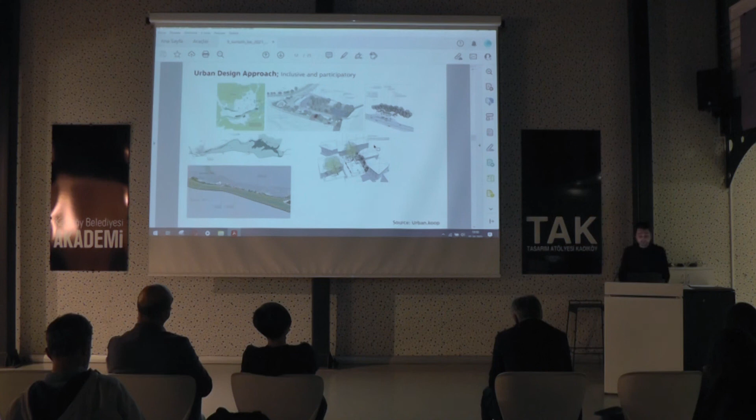So to regenerate these places, we also proposed some kind of new public interfaces near that corridor. In Havran, we proposed an agriculture innovation center project to create awareness about that green corridor, or to regenerate that green corridor. So this participatory and co-productive way of public places is a very important tool to take action in the future.

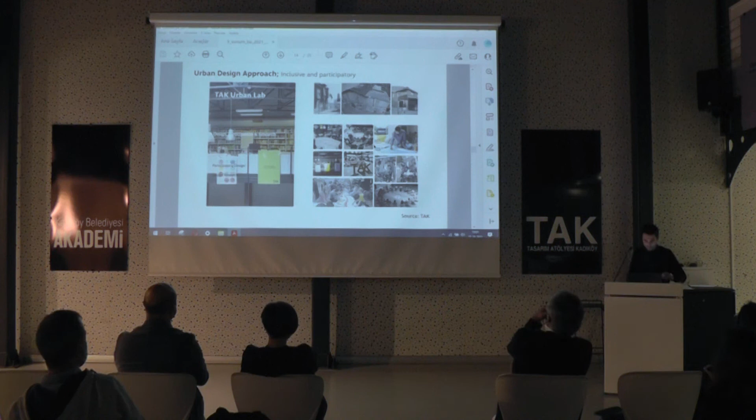So I talk about TAK here. This is an urban lab based on 3 things: design, participation, and research. It used to be an old cinema building, and this place was renovated parallel to the Yeldeğirmeni Regeneration project, and it helped this neighborhood a lot. So maybe we could think about some kind of these interfaces in our project.

We did lots of works. We did placemaking projects. We did voting processes, public art processes. Lots of actions and lots of public programs took place over time. So I also want to give some credit to this place also.

So I think we need to not just think in a very big scale, but we also need to think of some kind of micro actions to create some kind of sense in that kind of river flows. During this implementation, I think I reached at least 50 people from this installation in Perşembe Pazarı district, homeless people, street vendors.

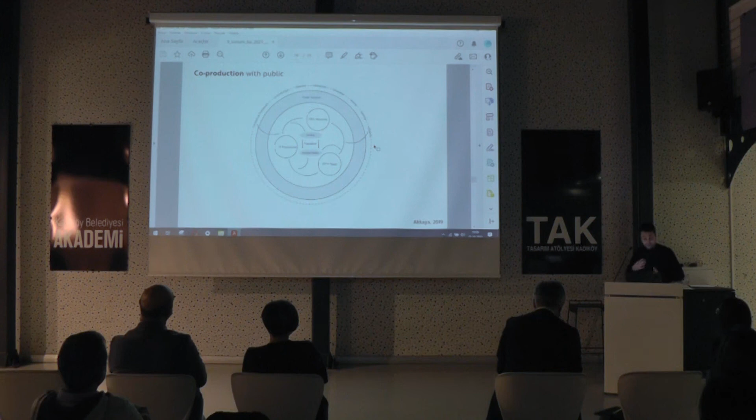So it's not about designing a spatial problem - after designing, you need to make programs. How can these places sustain themselves? So there are some keywords I want to mention: co-production, diversity, interaction, innovation, sharing, learning, and solidarity. These are very important keywords to fill this model with - how we can produce it.

And the last thing I want to emphasize for future work: everything that we do has impact. We don't assess the impacts of the projects we do. So I think assessing the impacts of the projects before, during, and after is very important - it's an issue we also need to work on.

I think this is an example we did in the urban strategy for Perşembe Pazarı historical district. They also wanted to renovate their public spaces, but all these public spaces are near local shops and historical bazaar areas - people are working in the bazaar areas, and when you regenerate these public places, it has this impact. So it's very important that we analyze our design projects' impact on people's lives.